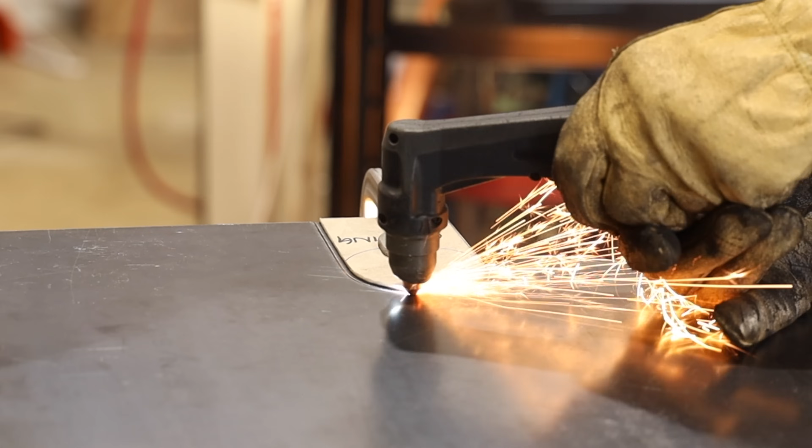We are back on another episode and we're bringing it back to basics today. We've had multiple comments, a few emails, and after speaking with Carl on the phone about some future videos that we're doing together, hint, I'm going home at the end of the week. We were chatting about some stuff and he actually suggested that this would be a good video.

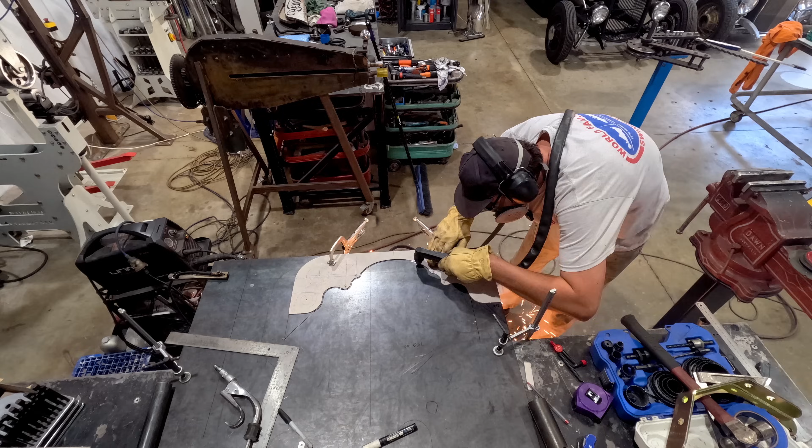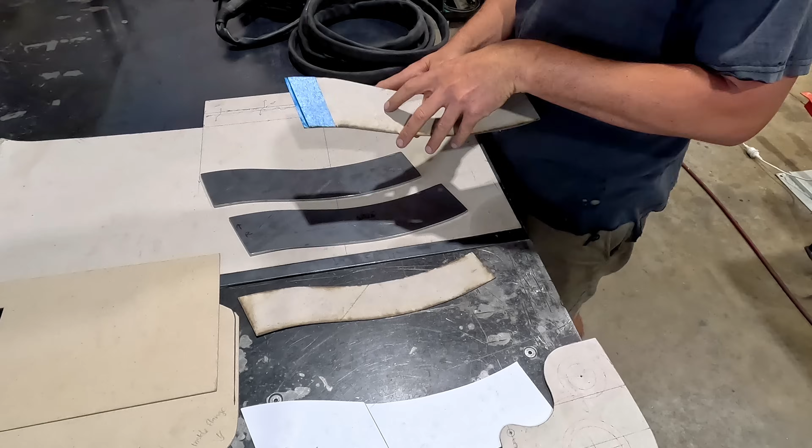What we'll be covering in this video is utilizing our handheld plasma cutter with CAD, cardboard assisted design. You guys have seen it. I love to use it. I would like to cover a few tips and tricks on how I utilize this straw board or cardboard in order to cut out simple shapes with our plasma cutter. So let's get into it.

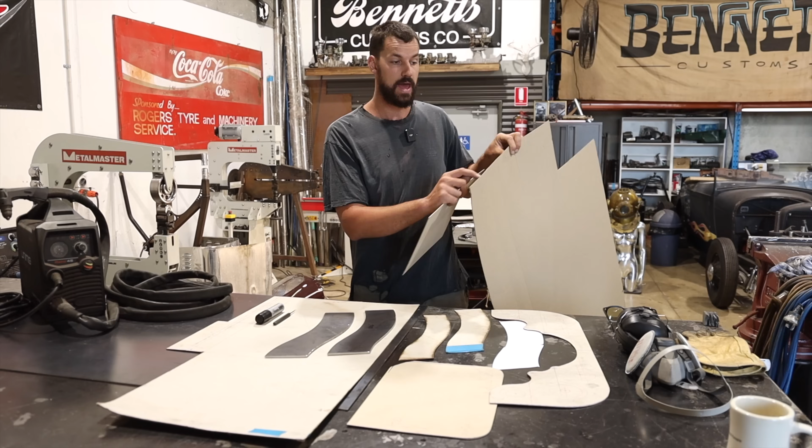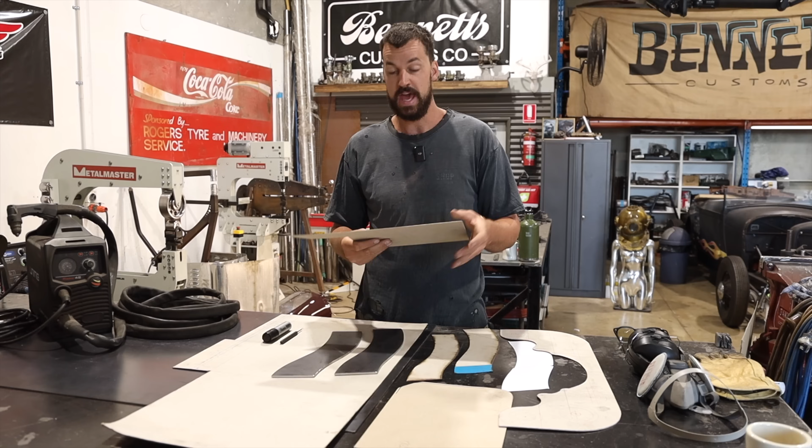So first off, I'd like to explain what I'm using here. There's a little bit of a difference between this straw board versus cardboard. As you guys know, cardboard usually has the sort of fluted internal, and this doesn't really work that well with plasma. The straw board that I usually use comes in different ounces, which is the kind of thicknesses of them. I usually use a 24 or a 48 ounce straw board. You can get it at all the craft stores. It's a little bit more expensive, but it definitely holds the rigidity and you can get a really nice clean cut, and it's great for making templates.

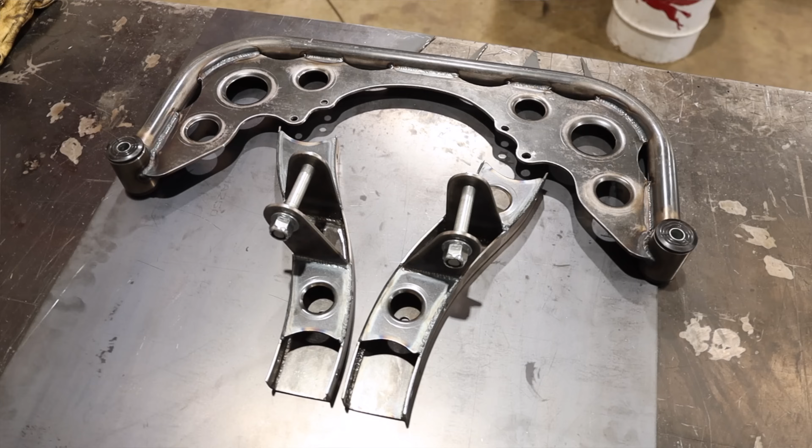I use this stuff all the time, whether I'm building a fuel tank for a car or a complete engine cradle like you've seen with the split window. And once you get the hang of it, obviously the possibilities are endless. I would just like to cover a few basic shapes, going into the details on our handheld plasma cutter. This is the Razor 45 amp Unimig Razor Cut, I think they call it.

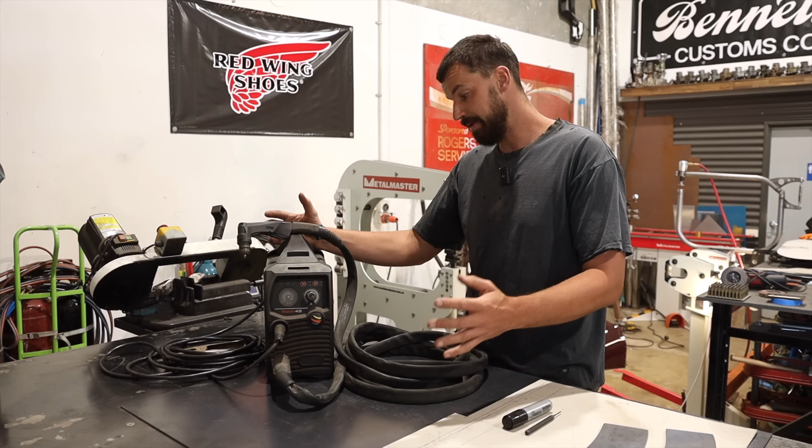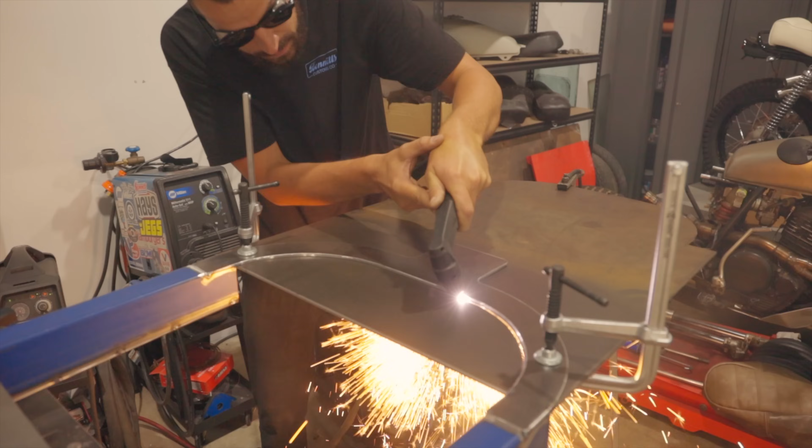This is a very versatile machine, and I really like how it's portable because I can use it for anything from cutting stuff off or cutting floors out of old cars. I can cut up to about 1/2 inch with this. Anything more, it doesn't really give you a nice clean cut. It cuts everything from mild steel to stainless, aluminum.

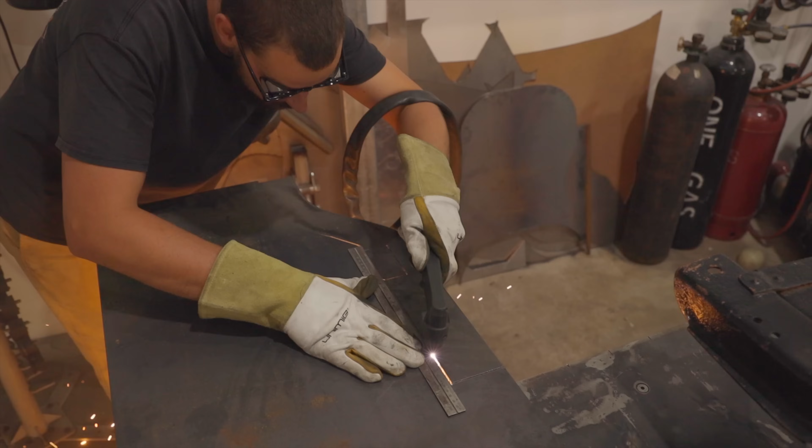Depending on the thickness that you're using is where you want to understand sort of gun control, I'll say, relative to your amperage. With thin sheet metal, you can obviously speed up the pace and you don't have to have as many amps going through it. Whereas if you're getting up into the thicker material, you obviously want to slow down your pace and turn your amperage up.

Before we get into any cutting, number one, you really want to make sure that you have a good clean tip and electrode in your torch itself. I usually run the 1 mil cutting tips, or they're 0.9. I go through these a fair bit because I really like to know that I have a really clean electrode and tip in order to get the cleanest cut possible. Can't stress enough, if you have a really nice setup in your torch, that's going to reflect heavily on the cutting of your material.

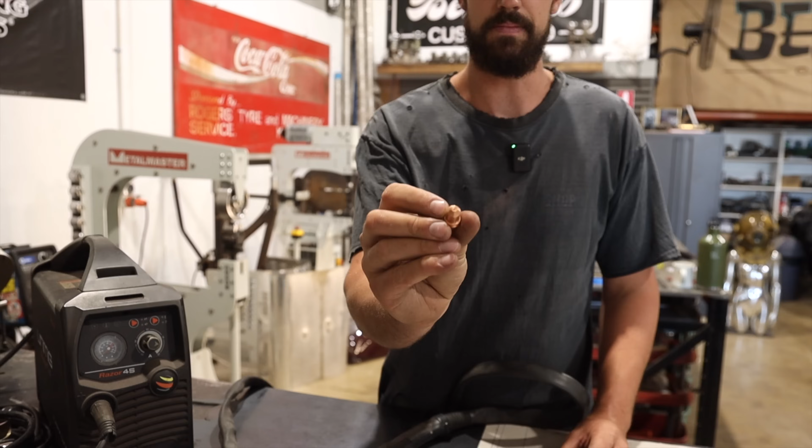So you can see this is a brand new tip, and the hole is very small and precise, and that is the cutting size. This one I've used for quite a while. You can obviously see that it starts to burn out and open up the hole, which is going to open up your cutting, and it flutters a little bit as well, so you're not getting a really clean arc all the way through, as well as your electrode. You really want to make sure that you replace these after they start to burn out. So I'm just going to put this one back together.

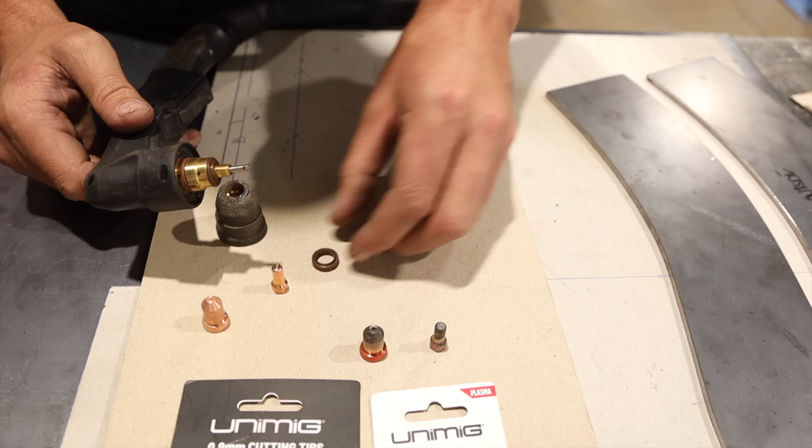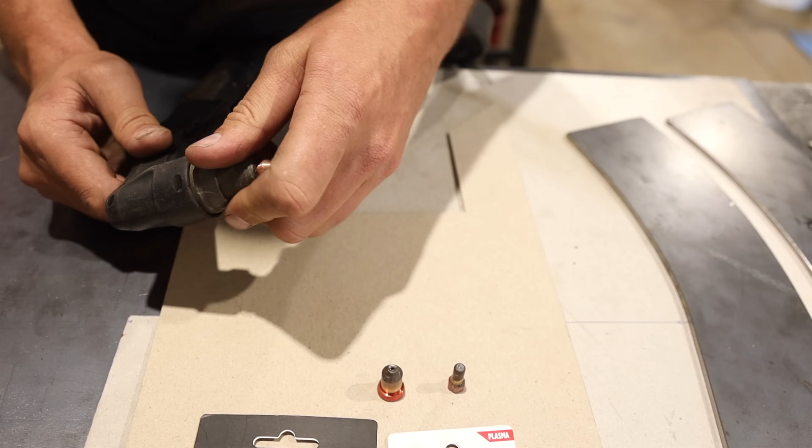So what we have here is our little air diffuser. This is our electrode insert. We then have our electrode that threads onto the end of it here. And then our actual cutting tip goes on the end of that. And our shield or our cup goes over top and screws in. You want to make sure this screws in all the way because there is a little stop or sensor in here, so it won't work properly unless this is actually fixed in.

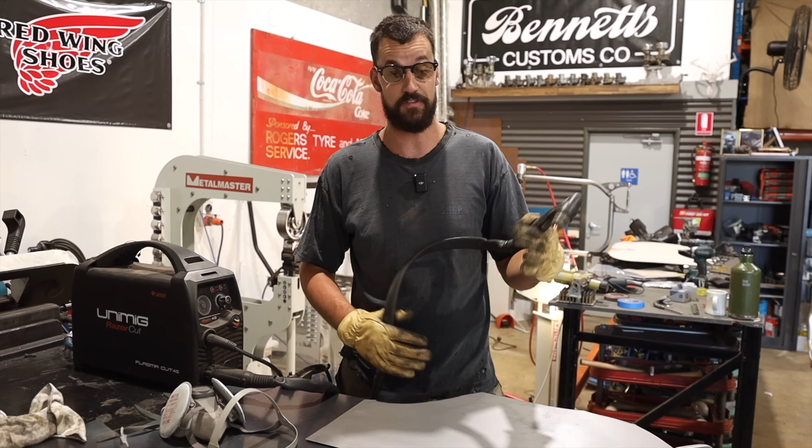Before we actually make a cut, I mentioned it before, you really want to be comfortable in the state of where you're going to be cutting. This is really going to reflect when we go to trace our material out in the cardboard. So I usually always run the lead over top of my shoulders, and this way there's nothing to catch on any of the material. So it's really comfortable, it's nice and stable. Cutting again, you definitely don't want to be pushing this thing.

It will not like it, and you will not get a clean cut if you're doing so. The tip will actually catch a lot, and it just doesn't work. So pulling towards you is going to be the biggest thing and kind of the only way you want to try and do it.

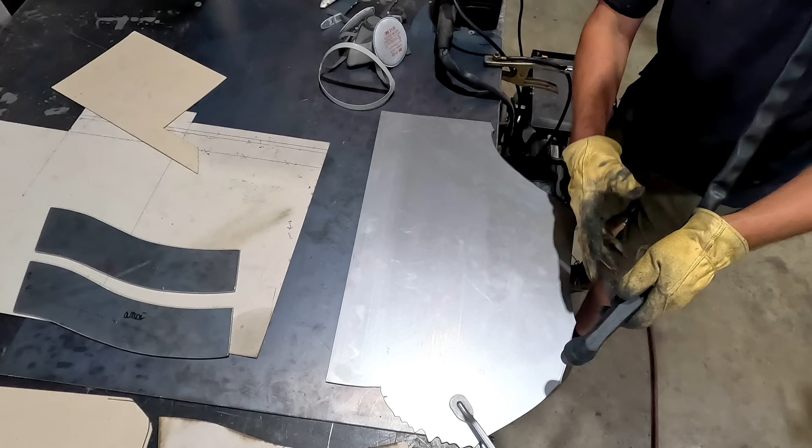So you can see, I would always do a test pass before actually cutting, making sure nothing's going to be in my way. I don't want my elbow to hit anything, because that's going to obviously bump and obstruct the material, and that's going to leave a mark in it that's really hard to get out. So you always want to just run a few test passes.

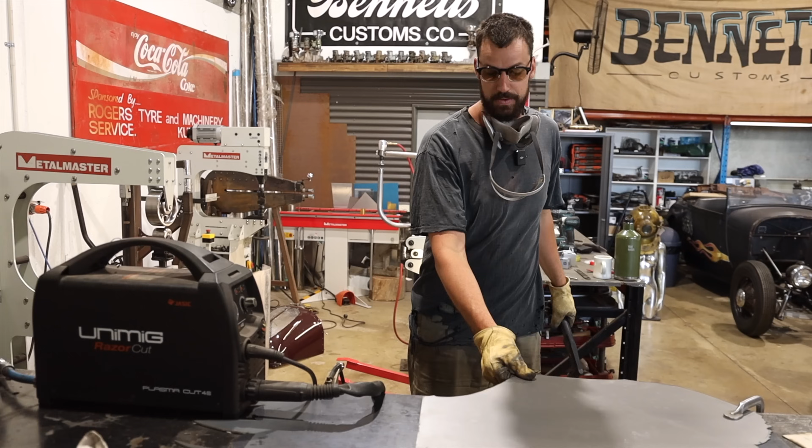Because we're only cutting through 1 mil steel, you definitely don't need the amperage you'd need for a thicker material, so we can turn that down. I think I'm running right now about 40 amps, so we're just going to turn this down to about, say, 25. I'm just going to cut a few strips off, and then I'll show you, and then we can kind of work into the thicker material, and then we'll go into the actual cardboard itself.

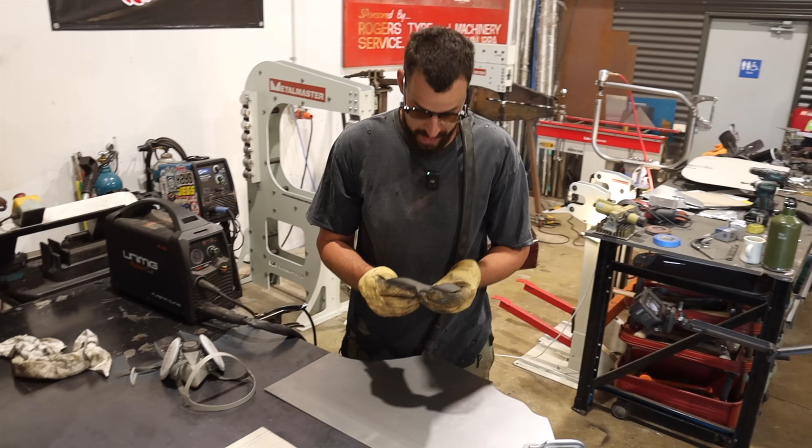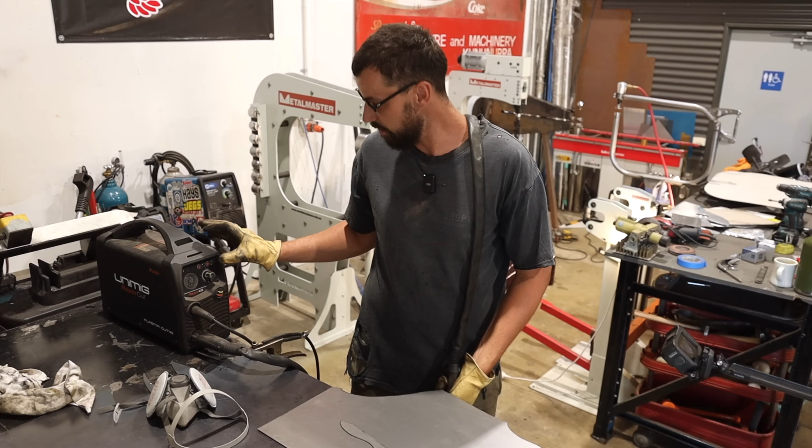On that one, I probably could go a little bit faster, and that will give us a little bit cleaner of a cut. There's definitely still a fair amount of slag that's kind of stuck on that edge. I'm running about 25 amps, so I'm just going to try and turn it down maybe, and we'll give it a go.

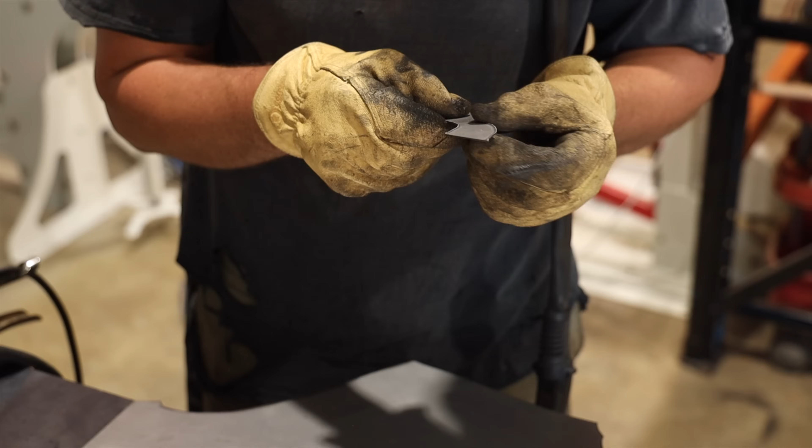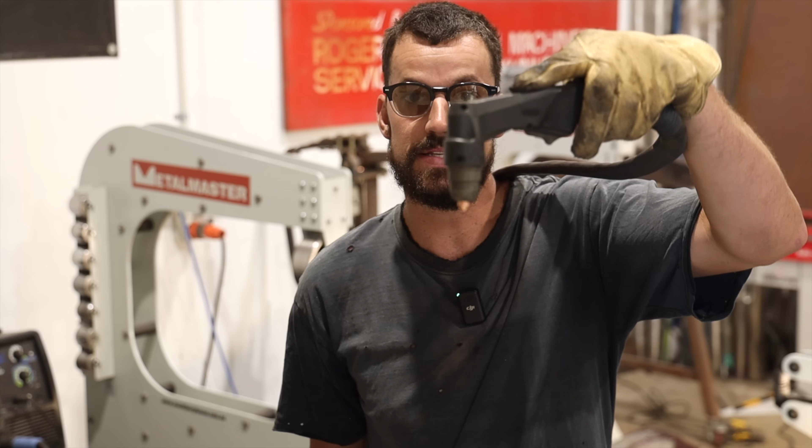That one is about the same, but you can see how you can create all different shapes. It's purely about how stable you can be while going. So the more fluid you are, the better, and you really want to make sure that cutting tip is directly 90 degrees to your material. I'm not pressing too hard, I'm just kind of letting the torch sit on there, do its thing, and then I can cut the material up.

But I'm definitely by no means pushing down or really hard on it at all, especially when you're going to come into using the straw board. If you have some scrap steel like I do, just go out, cut some shapes, and get used to the machine itself.

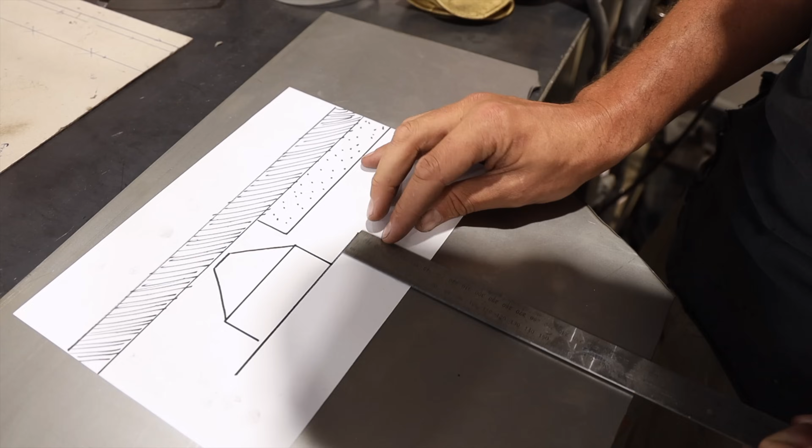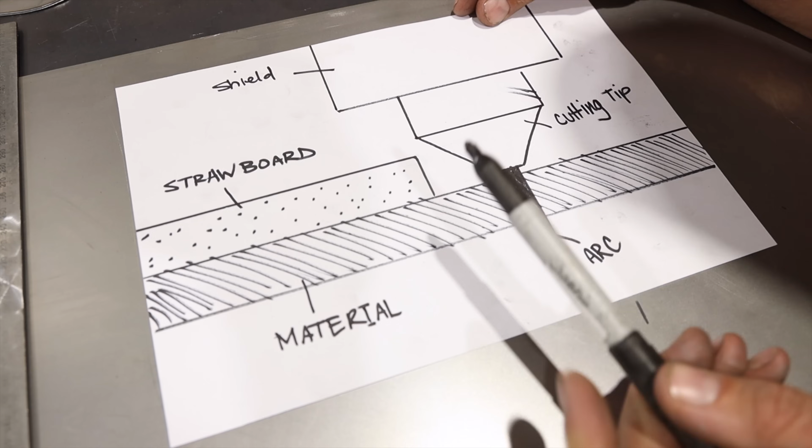All right, so what I have here is a little drawing that I've done for you. Quick explanation: this is the material we're trying to cut. Here is our straw board, our template that we are using, and then we have our shield and our cutting tip, and this is the arc that we are cutting. So we know that this arc here is 1 mil, so we want this cutting edge to be accurate to the size that we want.

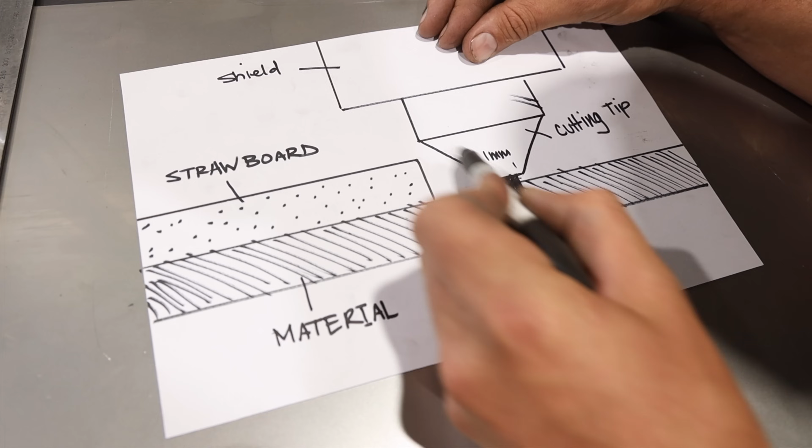Because the contact point from our straw board to the sort of 45-degree angle of our tip is not going to be precise to right here, if our template has to be accurate enough to travel right through and be the exact same size as our straw board, we need to make sure that this tip is cutting on this line.

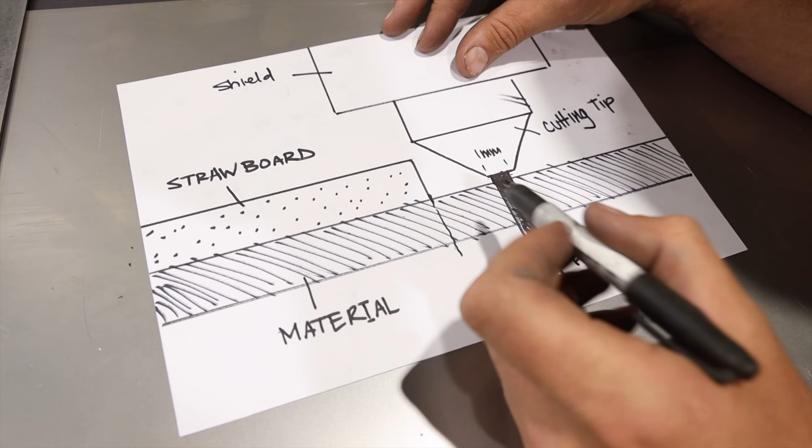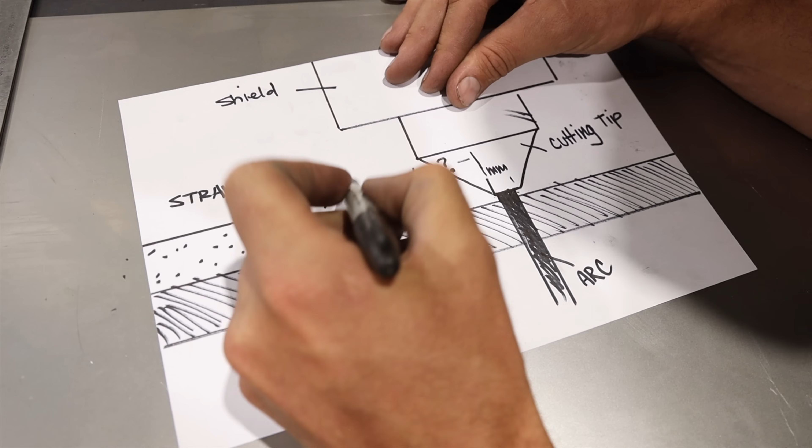So what you want to try to achieve, if you can — I'll show you how I set it up — is to measure the distance between the inside edge of our cutting tip to the edge of our straw board. Whatever this distance is has to be subtracted out of our straw board or our template, so this needs to be trimmed off. I'll show you how I do that as well.

But this is the crucial part: we have to eliminate this part here in order to have this inside line of our cut line directly on the line. For those of you using the more square tip, this could be a little easier to do the math, because you know the material is from center to the outside — that's the size you need to eliminate. When you're using the more angled, 45-degree tip like we have on the end here, it's a little different because of the contact point that makes to the straw board.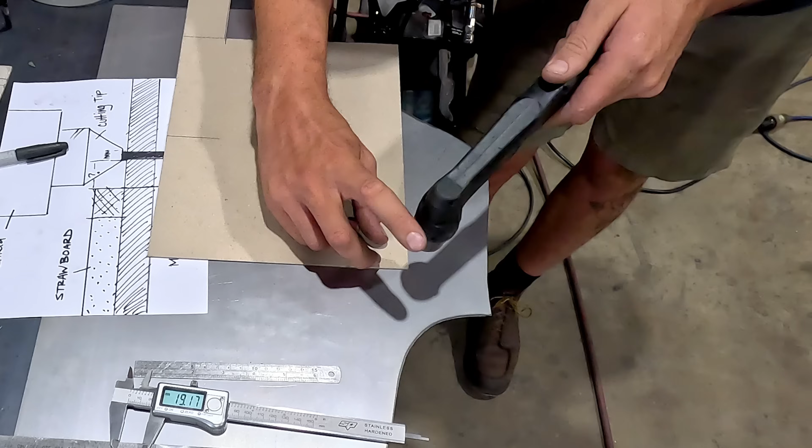What I'll do is I usually put this down on top of the material we're going to cut out, making sure it's flat, sitting in a nice position where I can measure it. If you have an edge, it works a little easier. But what I'll do is put this down, and I can already see that there's a gap.

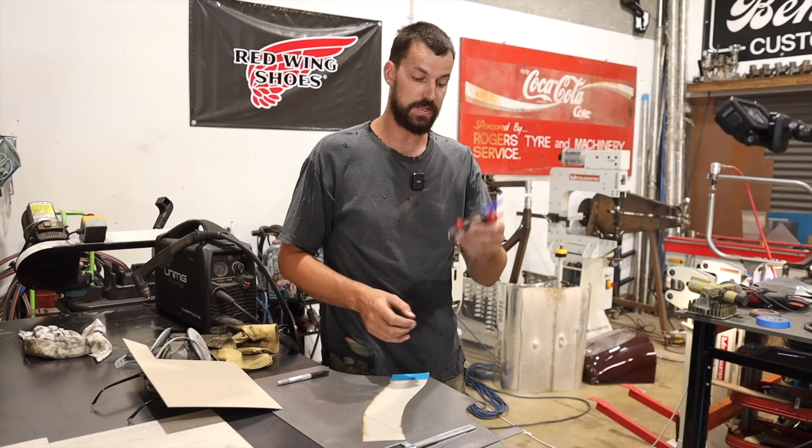And then I can measure, and I already know that it's about 3 mil because of how many times I've done this. So I know that this is 3 mil here that needs to be removed off of our material. So then I would set this at the 3 mil desired bit that I want to cut, and I can run this around the entire shape.

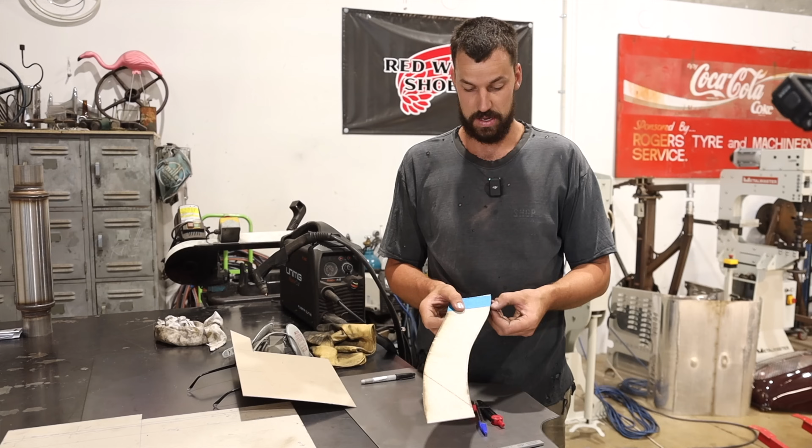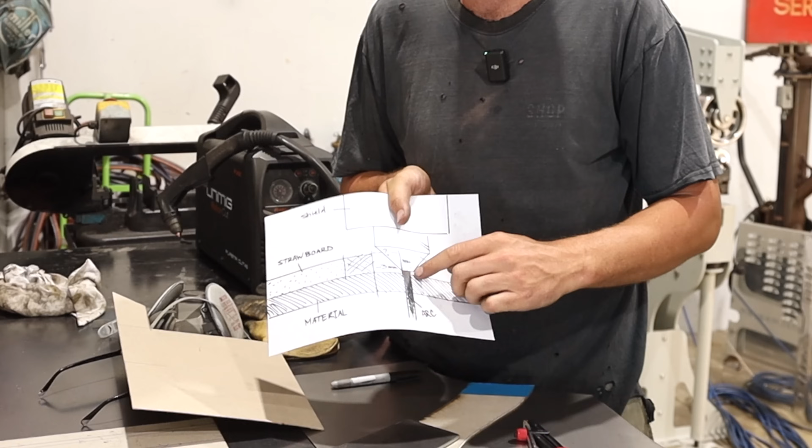You have a line that we can cut off. If you're not really confident in cutting right up on the exact line itself, you can take that 3 mil out of the tip and bring it back to the other side of your cut line. That'll allow you a little bit of wiggle room when you're going to clean up or finish the template out of steel. Sometimes it helps to cut out 2 of the same shapes.

So you got your one shape that's cut into your cardboard that is your main one. That's the exact size that you need to use as your template. And then you have your one that you've trimmed back the edges all the way around in order to get that desired shape.

When you have that, if you have your main one, you can put it down on your material and you can see how much needs to be taken off. So if you still have a little bit there after cutting that you can kind of come up to, a big thing is what I like to use is a Sharpie, sort of the big Magnum one. You'll probably see Carl uses this a lot in his videos as well, and it does work out for doing a bit of layout. Otherwise, you could use like a machinist dye or the blue layout.

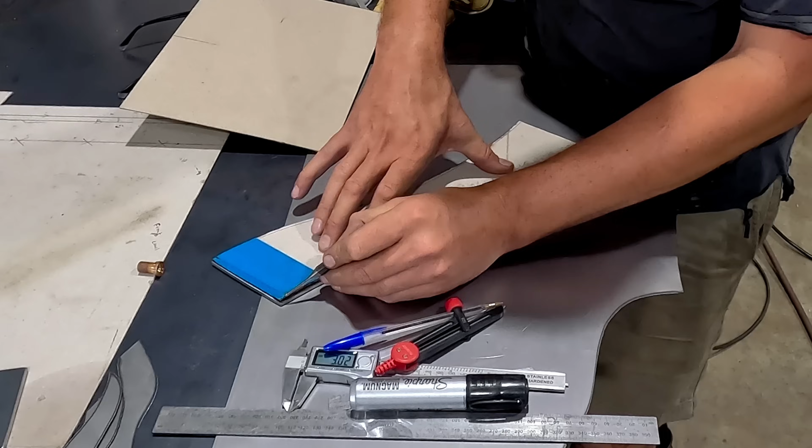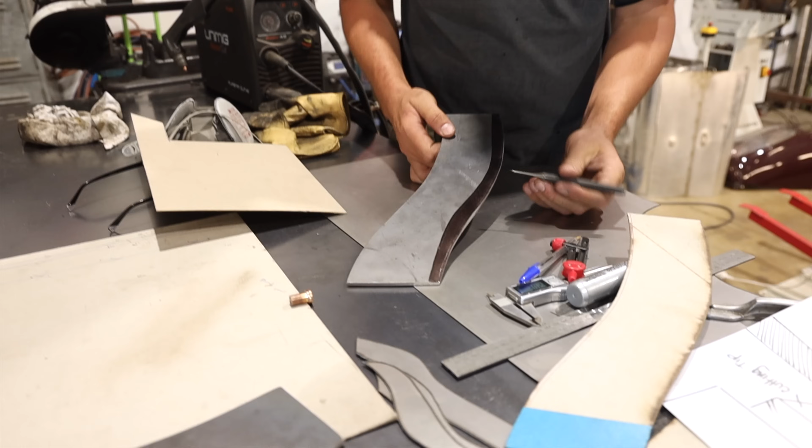So what I'll do is I'll run it along the edge here. I'll let that dry. I will take our main template out. I'll lay it down and say, okay, we need to come up to this edge. Again, this cardboard works really well for being able to scribe and give you a clean line. So now I know that I have a really nice line that's clean, that's the exact one that I can kind of grind up to.

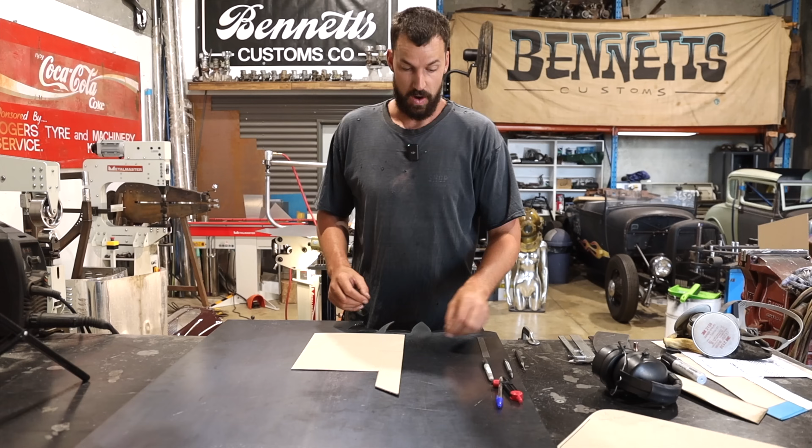All right, so what I'm gonna just do is, as a simple shape, is kind of an important one, I suppose, that a lot of people would be creating, is just like a tab. So it's just gonna be something similar to this, and then we'll run a hole in it, and that's gonna be like a weld-on tab for some sort of attachment or a seatbelt tab or something like that.

But at least I can kind of show you what we're trying to create. When I'm doing my layout on the straw board as well, I never really use a Sharpie because I don't like the thickness that this puts out. So I want to be a little bit more accurate. So I'll end up always using a scribe or like a ballpoint pen, and that way I can kind of get a bit closer to the exact size that I want.

So I'm just going to roughly lay out a tab, and I'm just going to go with, say, we'll go 3 inches wide.

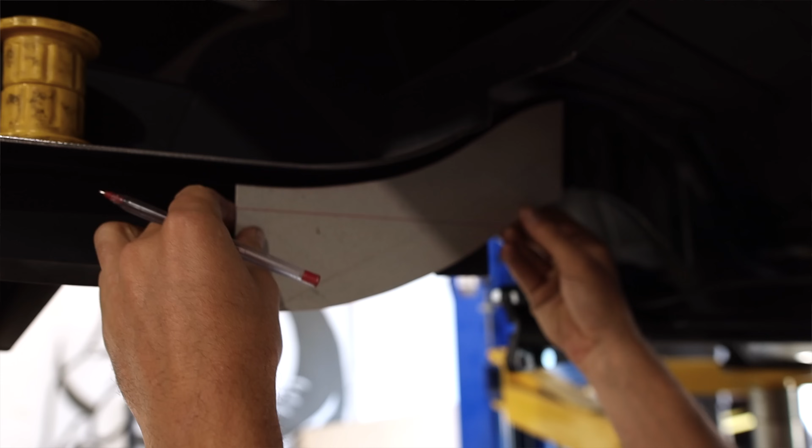It's really fun to sort of lay all this out. And the best thing is like, even when I was doing those motor mounts, you can create all these and you can even cut this hole out as long as you know your measurements. You can use these and actually put them up into place, throw a bolt through them, and it'll really show you if you need to add a little bit more.

If you don't get it right the first time, just keep cutting or add a little bit of tape so you know where it is, transfer it, cut a few more out until you get the desired shape that you're after. And another thing too is, to create your template and then having to cut that 3 mil off the edge, you could just take that into consideration when you're creating the template. But the only thing is it might not be accurate to exactly what you want to build.

So sometimes I'm trying to do a 3D structure, so I'm taping a bunch of these together to build something that I want to create. You can't really do that with dictating removing that 3 mil off the edge the whole way. The whole setup would be a little bit different.

So now that we have our layout, I need to cut this out. Biggest thing is a fresh blade in your Stanley knife. And something I don't do enough, but I should, is cutting it on a piece of glass.

The biggest thing is it makes for a really nice clean cut, and it also saves the longevity of your blades. Cutting it on steel, which you see I do a lot, kills the blade right away, which then gives you not the greatest cut.

Then we can grab our ruler and cut these out as close as possible. This Stanley knife is probably fine, but you could use a really nice X-Acto blade with a really thin tip to do it as well. If you're not too confident getting right up onto your line, you can leave a little bit of space, and then come back and use the linisher to clean that up and have a really nice smooth radius if you want.

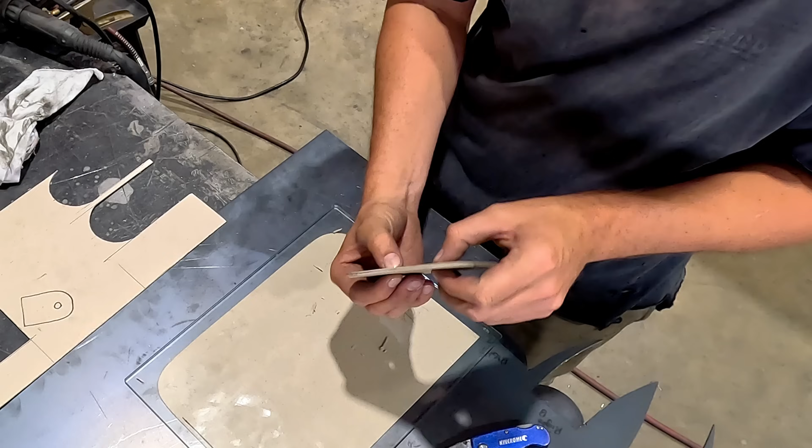I could run over to the linisher and just quickly give that a little sweep. I might even try it, I'll show you. Sometimes it works, but it does leave kind of a beveled edge that you need to trim off, and obviously grit as well.

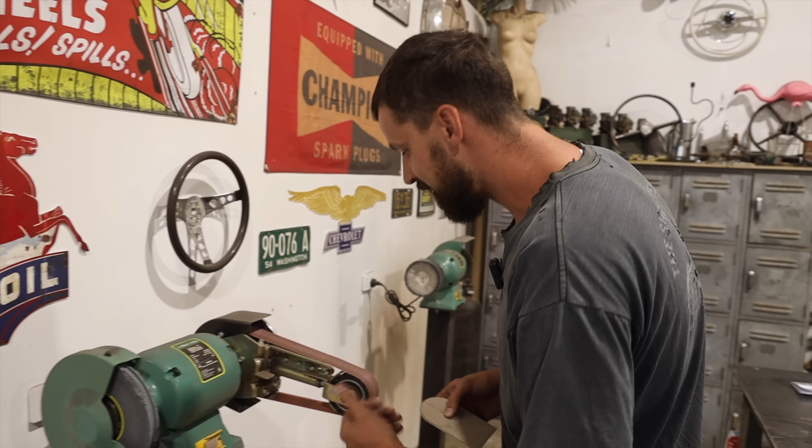I don't know exactly what grit this is, maybe 120. You could probably go even a little finer, like 220 or 240, but we'll just show you. Just grabbing my eye protection, since even cardboard can get in your eyes.

So you can see there that we have a nice clean edge now.

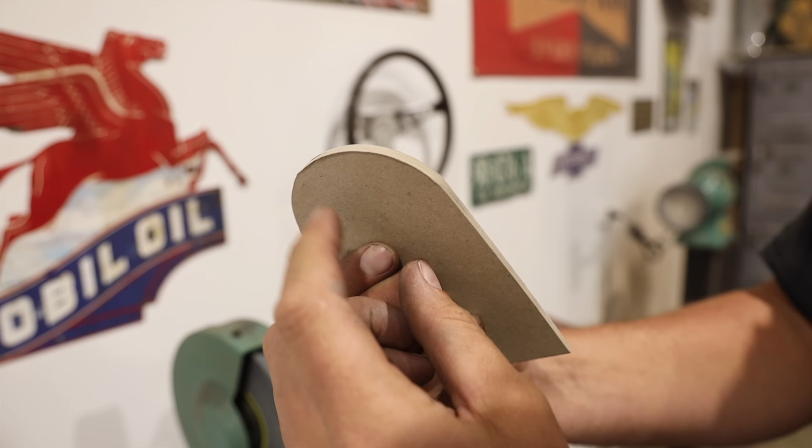Now that we have our two pieces, we need to know which is which. So I'm just going to write that this is our main one, and this is going to be our cutting template. So this is the one we're going to use with the plasma, and this is the one that's going to dictate making sure we're getting an accurate layout on our steel.

We know that we need to remove 3 mil around the entire radius of this in order to accurately cut the desired size that we want. So I'm going to set this up.

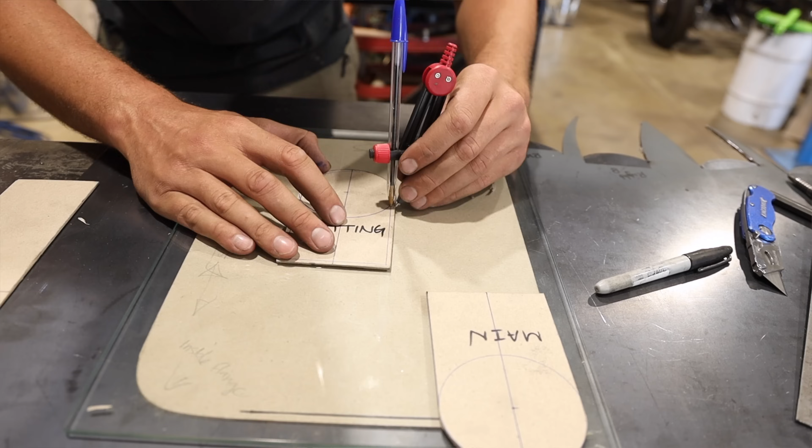Now that we have our area, we need to remove this excess material. So back onto the ruler.

So I'm going to put that maybe right in the middle. You could use two clamps if you needed to, but I think we should be all right with this.

Now that we have the area there, I would take my center punch and line it up with the hole we have there. Now we have the center punch hole where I would drill out and put a bolt through for fixing to something.

So let's cut this out. We are using some 3 mil steel plate to cut these out, and I'm running about 40 amps, I believe.

But I change it up a little depending on how intricate the template is. If it's really intricate and I have to take my time around the corners, I can turn it down a bit because I know I'm traveling at a slower speed. Or if it's just a simple square that we're cutting out, I can turn the amps up and travel a bit faster. So it's purely going to depend on what you're working with in the template you're creating.

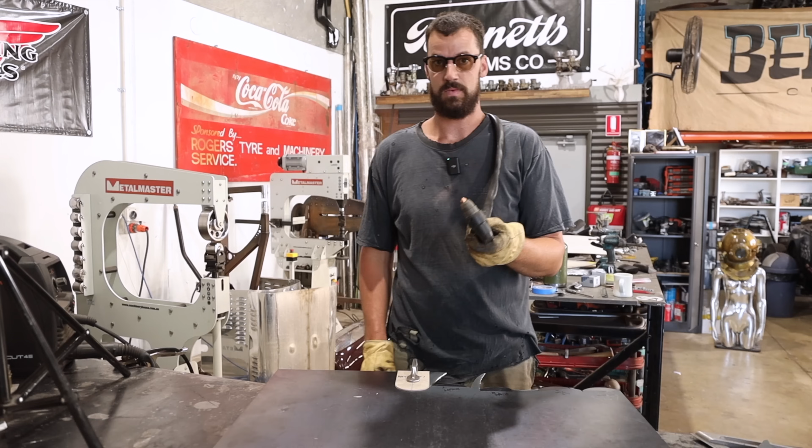When you're using this, you definitely want to make sure you're wearing your protective equipment, especially a mask or a respirator. Purely for the example of this video, we have the fan behind me with both doors open, and I'm hoping I can speak through while doing it, with that fan directly behind us to blow a bit of this away.

I want to make sure that I'm comfortable while cutting this out, so I don't want to catch on anything. I know I have this right here, so I'm actually just going to cut this off quickly, so it can't catch my gloves or my shirt. As you can see, it catches all the time.

I also want to make sure I have enough material hanging off the edge of our fab table, so I'm not going to cut into that as well. Underneath, you want to make sure you have a nice clean floor space with nothing flammable around you.

So again, I'm going to try starting maybe at this point, and I'm going to pull towards myself. That way I'm pulling right around the edge of this, and maybe I can stop it there, or I can continue to go through depending on how I'm positioned and how I'm feeling during the cut. At any point I can stop, and we can start and come back into it.

You definitely don't want to start right on your start line, because that will create a little hole you want to puncture through, but sometimes it's a little bit bigger than the actual cutting tip, so you'll have a tiny little notch in your material. If we were to start, I'd want to start kind of out here even, and then come into it if I was just doing one cut like that.

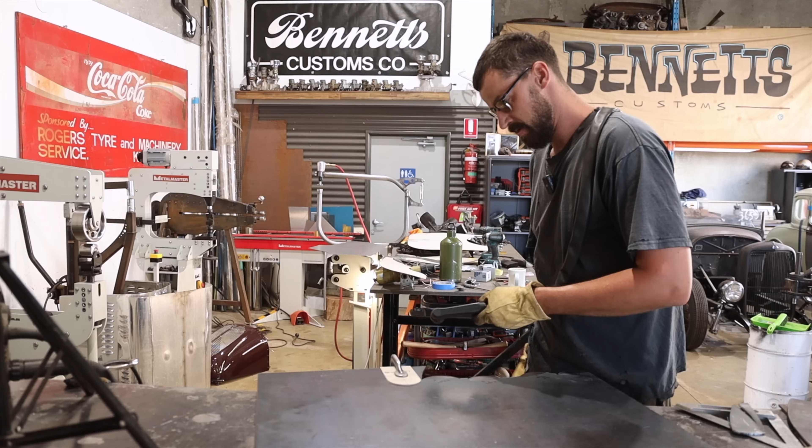The position of my torch as well, making sure I keep it 90 degrees to our material, and I'm not pushing really hard against this. I don't want to push too hard because it will actually want to roll over and cut the material. I'm just sort of letting the torch do its thing, trying to smoothly guide it to where I want to go.

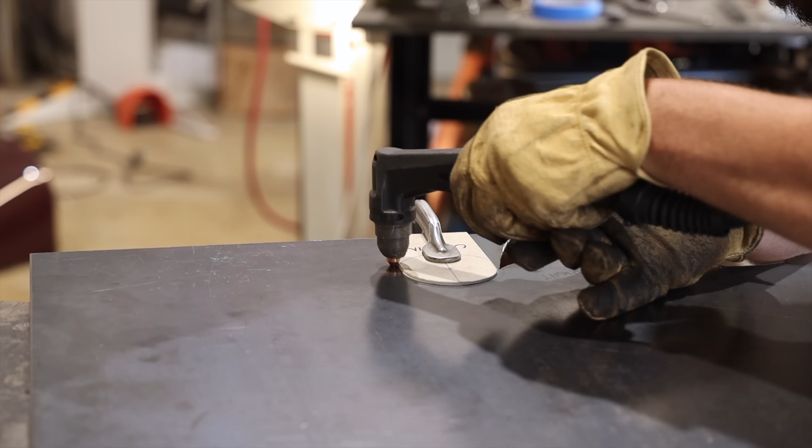Just going to do a practice pass. I think I should be able to get right to that.

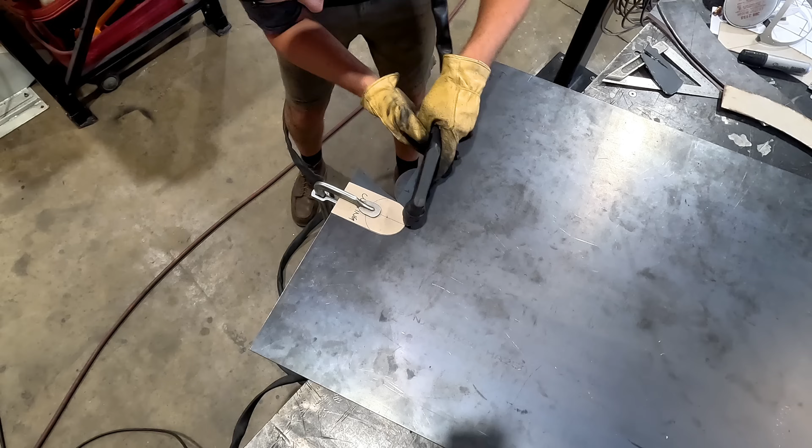And then, oh, that's actually going to cut it. So I was actually just going to start there and run this right across and stop at that little point, which means this whole piece of material would then fall. So prior to that, I'm going to cut this piece off here. I'm going to start there, cut that off. That material is going to be gone. Then by the time I cut that out, this will be sort of one piece.

Nice clean cut, consistent. The speed was good. Amperage is really good. All right, so now let's go for our radius.

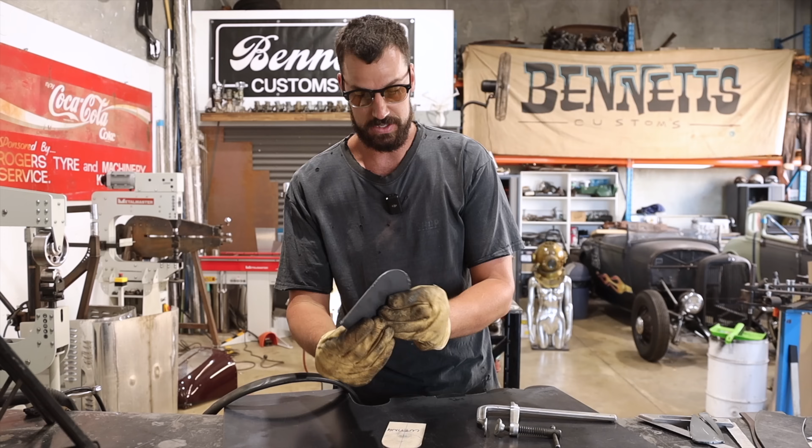You may have saw there, I was kind of trying to use my legs and not so much my arms. I was trying to steady my upper body, while my arms were just guiding the torch, and I was using my legs to try and get around that radius as clean as we could. You can see that we got a relatively nice, clean, fluid cut, especially around the radius, which is really nice.

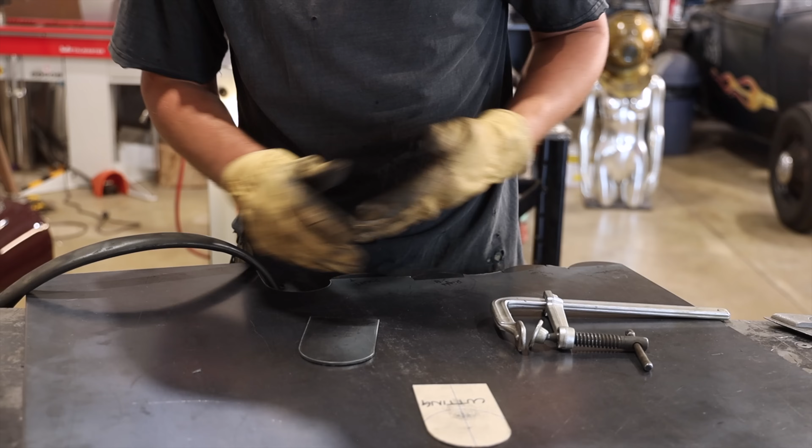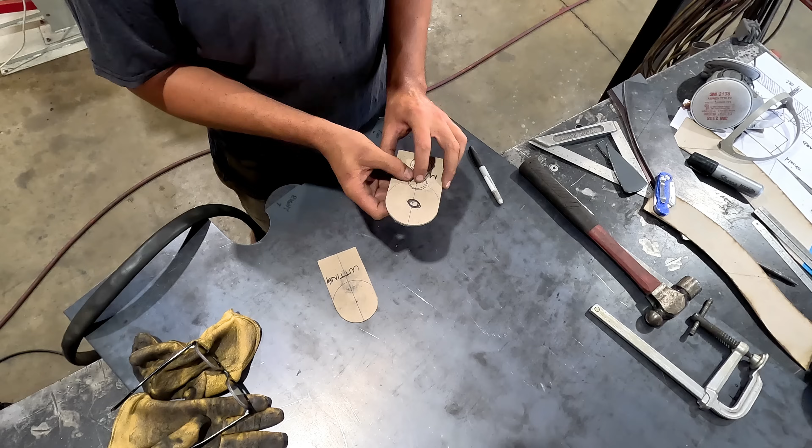And then there is just a little bit of slag here that we can knock off, or sand out. So we're just going to lay our main template on top to see where we're at from our cutting template to our actual material we wanted to cut, and the main shape we were trying to create. If we lay this on and flip it over, you can see it's almost nearly the exact same. But what I'd like to do is still jump over onto the linisher and give this a quick clean and slightly bevel the edge, and then I'll bring it over and show you what I mean.

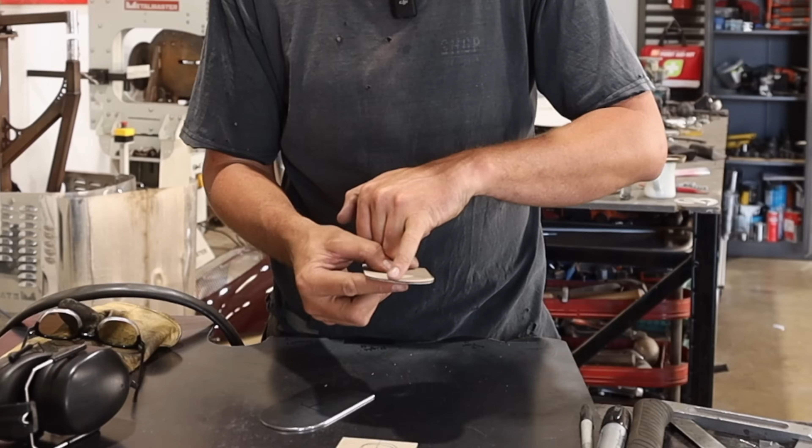All right, so after just spending a quick couple seconds on the linisher with the 120 grit on there, you're able to get a really nice clean edge, and then I just slightly bevel so there's no burrs on the outside. You can kind of get the idea of what I'm trying to explain, that you can use this stuff to cut out. As you can see, there's only a very small amount of burning just in this one little area, so this is definitely reusable. You can use this as many times as you need until it's fully burnt out and you can't use it anymore. So you always just want to make sure you've got a really nice, clean, sharp edge for that tip to travel on.

It's not as complicated as you think. And again, hopefully I haven't lost you, but I'm just trying to explain what I've kind of learned by using this stuff, and it definitely works.

So if you're creating some really advanced design pieces, this is still a very good setup. It's a lot cheaper to be able to throw away a piece of cardboard than it is a sheet of steel. So as long as you get that template accurate to what you're creating, you can just transfer it straight onto the steel and trace around those edges.

For those of you guys at home with a handheld plasma torch like us, hopefully this will help you get a bit creative with making some really neat gussets or whatever you're trying to create on your car, or not car related at all.